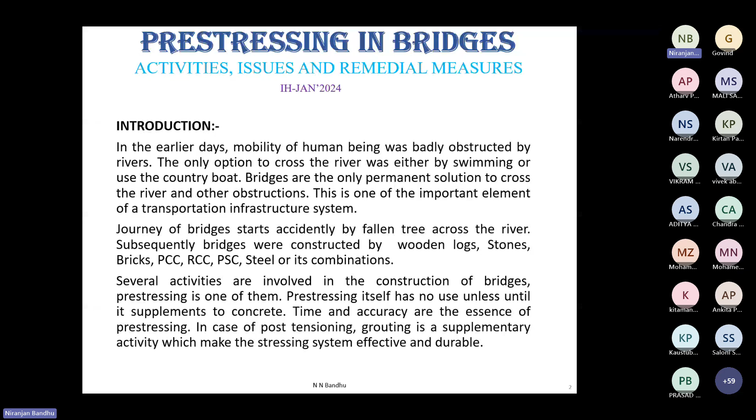Prestressing itself has no use unless it supplements the concrete. Time and accuracy are the essence of pre-stressing. In case of post-tensioning, grouting is a supplementary activity which makes the stressing system effective and durable. Introduction of pre-stressing to concrete was pioneered by Freyssinet. The first pre-stressed concrete bridge in India was constructed in 1948 for a span of 12.8 meters in Siliguri on the Assam Link Rail project.

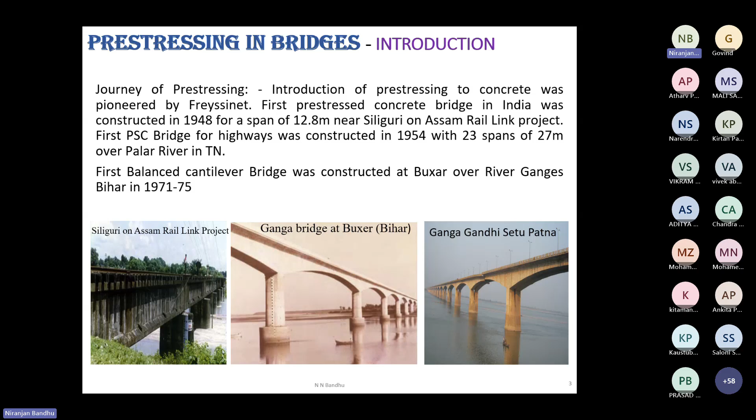The first PSC bridge for highways was constructed in 1954 with a span of 27 meters on the Palar River in Tamil Nadu. The first balanced cantilever bridge was constructed at Buxar over the river Ganges in 1971-75. Subsequently, Gandhi Setu was constructed and inaugurated in 1984 at Patna, and by that time it was the longest river bridge in Asia, 5775 meters. This is the journey.

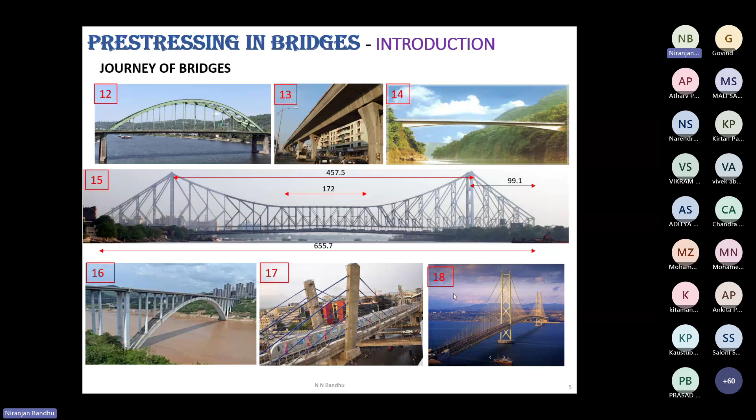Then arch bridge, cable stay bridge, and suspension bridge. Suspension bridge can be extended up to 2033 meters. Now recently it is to be inaugurated.

Vivek, sir. Yes, sir. We are able to see. Yes, sir, it is visible.

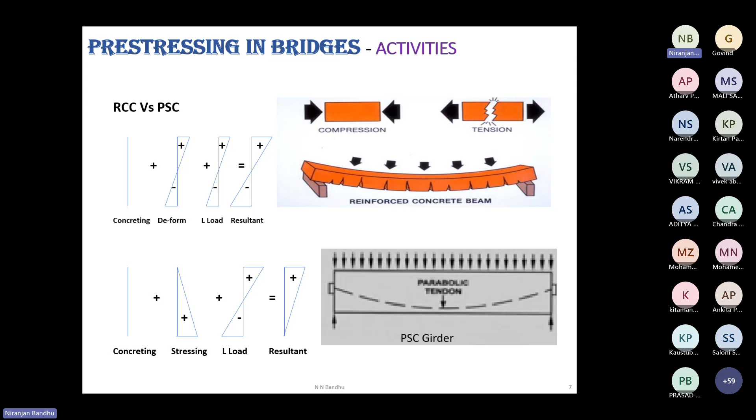But in case of PSC, there is no tension. Just see number one, only a vertical line is there, meaning no tension, no compression. But after stressing, there is compression at bottom, and at top there is neutral, no tension no compression. But after loading, at the top compression comes, and as a result at the bottom there will not be any tension, but at the top there will be compression only.

So how does it work? The function of prestressing is to compress the structure, and at the same time a self-lifting mechanism is there, like a rope we use for hanging our clothes. In a similar way, it works here.

So prestressing is an arrangement which is deployed permanently in concrete. It boosts up the tensile strength of concrete members. It is applied in a way which increases axial compression that counteracts the tensile stresses set up in the member due to dead load, live load, or accidental loads whatsoever may be.

There are several advantages with PSC: we can have larger spans and the section remains uncracked. We have seen previously there is no tension at the bottom, so it is uncracked and suitable for precast construction also, and very fast construction due to repetition possibility.

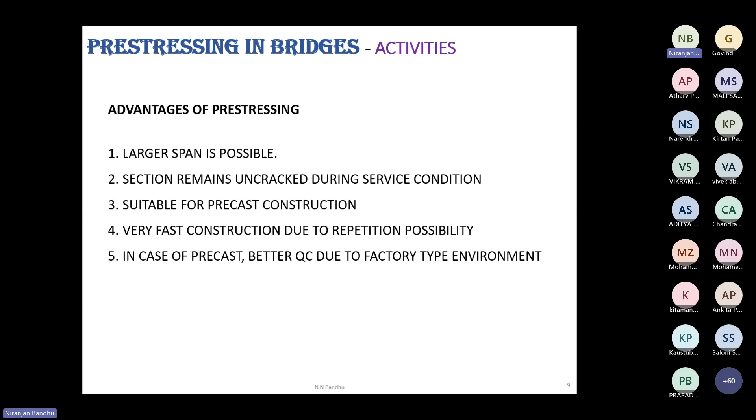In case of precast, better QC is possible due to factory type environment, but there are some limitations and issues. It requires highly skilled technical manpower due to precision work, relatively higher cost due to casting yard setup, and requirement of auxiliary equipment.

Design is more complex. There are chances of slip of wires, breaking of strands, punching of anchor cone or bursting of concrete, and leakage in sheathing. These are the issues and limitations.

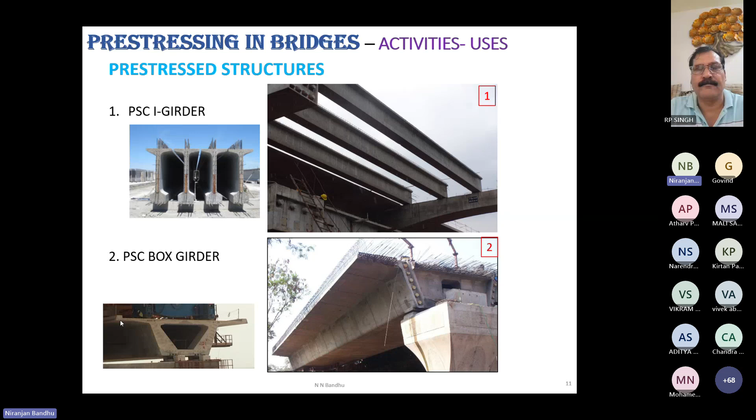Then box girder, it is a confined box, that is why it is known as box girder. Bottom is known as soffit, and the side, which can be vertical or inclined, is known as web. At the top, this top slab is known as deck slab.

Similarly, PSC segmental box girder is cast in pieces and stressed and grouted to make it one piece.

Then PSC U-girder, as the name implies, it is U type. It is more common and preferable for metro rail structures.

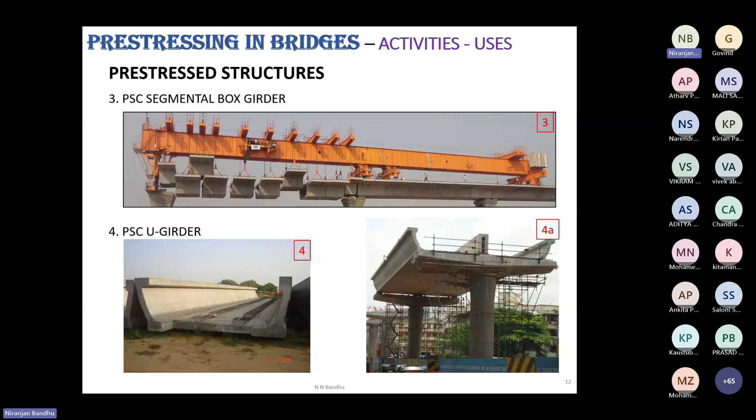It's a PSC pier cap. This can be cast in situ or precast to increase the headroom and lower down the deck slab.

PSC portal - sometimes a portal is required to reduce the section, so PSC is used.

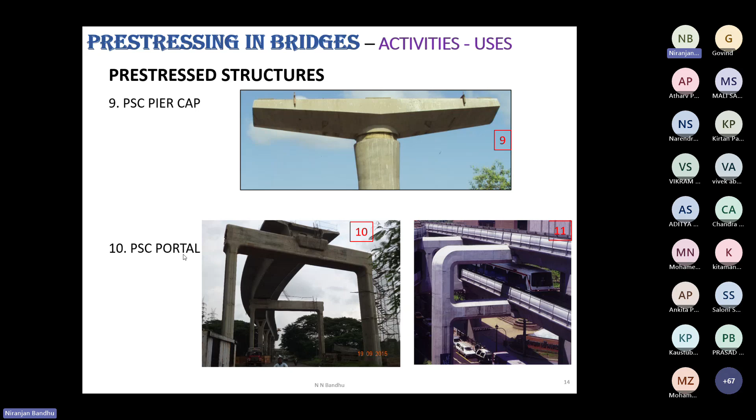Cantilever - this is the cantilever and this is PSC. And number 13 was not PSC.

Actually, it's a story from DMRC. Earlier, there was a provision of a portal, but some people, shopkeepers, were not allowing one pier on one side. Then they converted it to reduce the burden in addressing the requirement. Converted to cantilever, and then it collapsed.

Another one is very important.

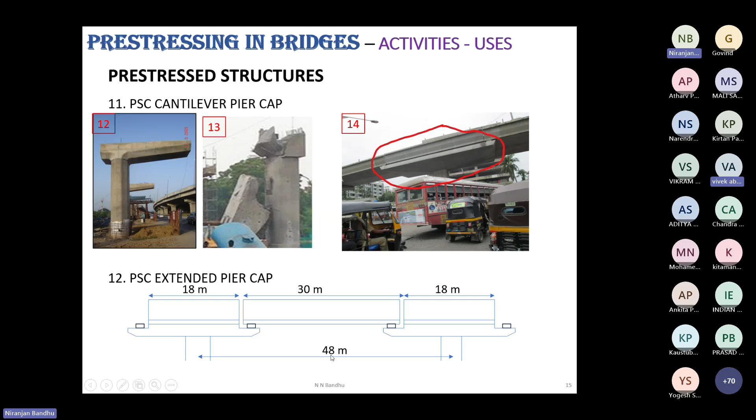This is we are talking about extended pier cap. This is the actual example of Mumbai Metro Line 1, where the Mithi river is there. Due to Mithi river, we have to have our pier on either side of the bridge without obstructing the river. Our U girder was 30 meter and we were not able to change here, so we have provided extended pier cap of 18 meter. So instead of 30, our obligatory span was 48 meter. This is the use of this extended pier cap.

Now, in PSC, sometimes we have to use prestressing system in deck slab also. Cable bridges also require prestressing. And sometimes we are using PSC in building also, building slabs, railway slab, railway sleeper, and electric pole. These are the uses of prestressing system.

Now we are talking about type by casting and stressing sequence. We have two types: one is pre-tension, another is post-tension. Pre-tension means we have to apply force before casting. Post-tension means first of all we have to cast, and we have provided a duct hole for the insertion of a strand, and after hardening, stressing is done.

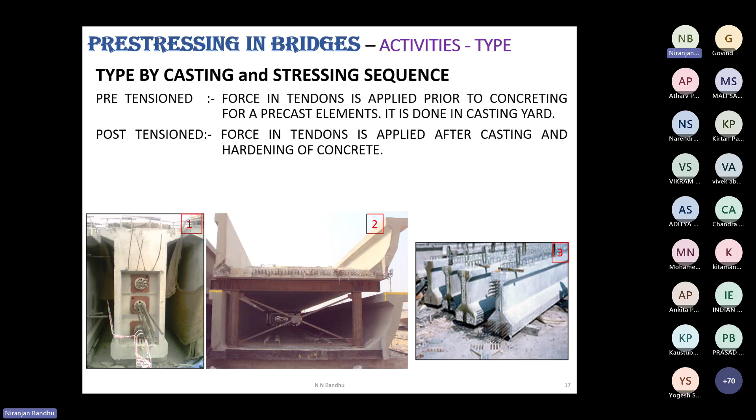By stroke, it can be a single stroke, two stroke, or multi stroke, because a ram in the jack has some limitation. So if elongation is up to 200 mm, then single stroke jack will be sufficient, otherwise we have to have more than one stroke. Sometimes, due to technical issue, we have to use it in 3 stages.

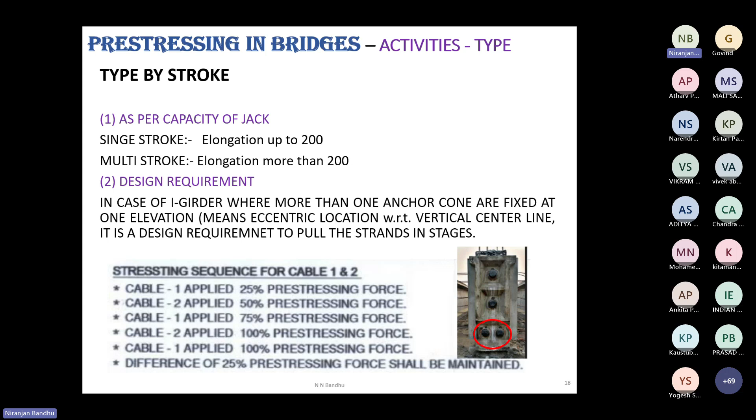I have given one photograph of an I girder with 2 cables at the bottom, both eccentric. Suppose anyone is stressed up to 100%, then there will definitely be a chance of bending. So we have to stress 25% only in one, then go to 50% in another, so the difference will be only 25%. So there will not be any chance of bending. So we have to take care if 2 or more than 2 cables are there at the bottom.

Now, stage wise. Sometimes we cannot stress all the cables at a time in one go. In that case, the problem is if we stress, there will be chances of tension and hogging will be more. So we are stressing few cables, then loading is given, then stressing, then loading, like that. So whatever hogging is there, that will be compensated after loading. Then once again it is stressed. So it is done stage wise.

Next is as per jack position. For shorter span, we are using one end stressing only. And if it is longer than 40 meter, then we are using both end stressing.

Now coming to anchorage system. This is the key accessory. Use of anchorage system is to just hold the stressed strand in position without any losses. It's a combination of anchor cone, bearing plate, wedges, spiral bars, etc., which is used to hold the tendons in a stressed condition, and at the same time it is used to transfer the load.

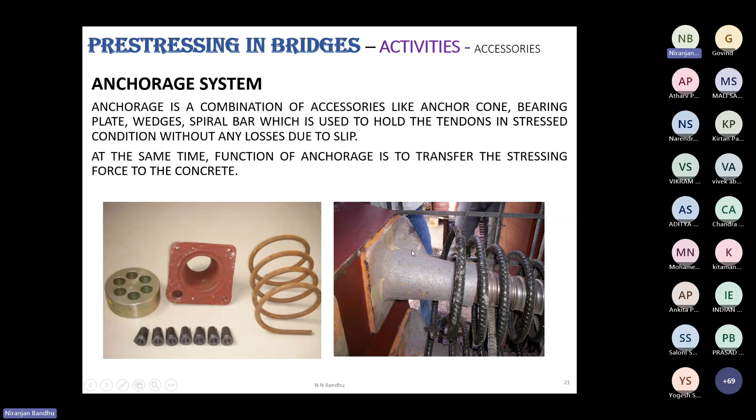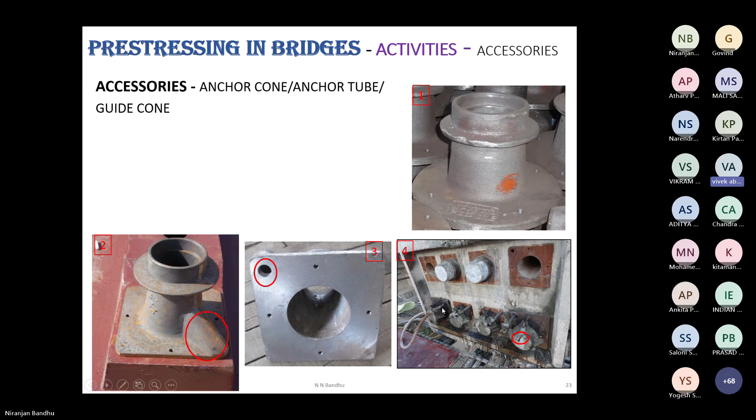Now coming to sheathing. We have 2 types of sheathing: one is bright metal sheathing, another is HDPE sheathing.

High density polyethylene, HDPE. The left side is meant for bridges, whereas this one is flat for slab. It can also be used in deck slab and building applications.

Diameter varies as per number of strands. The total internal area should be more than the total area of the strand. Only 1/3 of the area is occupied by the strand, so 2/3 space should remain so that grouting will be effective.

One important thing is jointing. Here jointing is done. On the left side, number 1, a heat shrink coupler has been placed.

You can see, Vivek sir. Hello, yes sir. Hello, yes sir, you are audible. Just I want to confirm whether I am talking or not, is it okay, are you audible? We can see the slides also. You can continue, sir. Okay.

So here this heat shrink coupler, this is known as heat shrink. Once it is heated, in the next slide you will see the same corrugation appears on the coupler also, and there will not be any leakage chance. There is no chance of leakage.

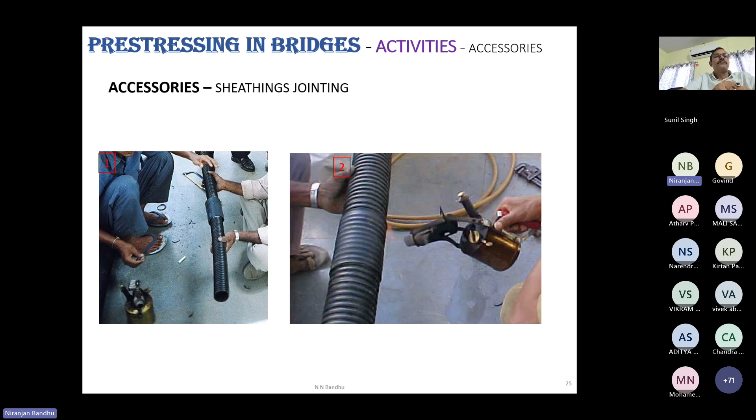Another accessory is the wedge plate or bearing plate. It is cut in pieces and a truncated cone hole is made, and after fixing it will look like this, number 5.

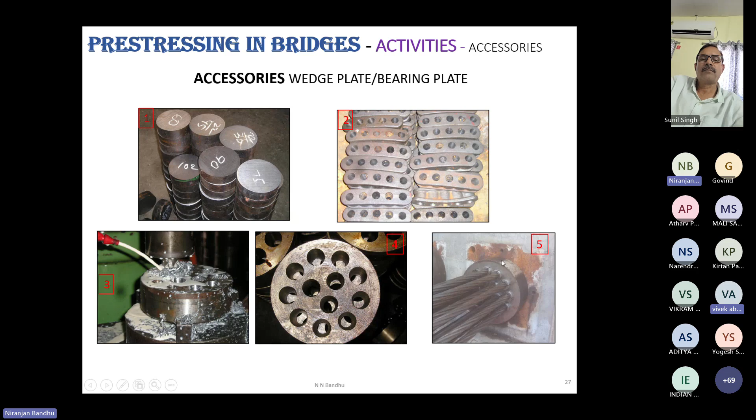Then wedges. It is cut in pieces of this length, and this shape is given, and after giving this shape, threading is done. Threading, photo number 6, we can see the threading is done.

But one precaution is that this thread should not be sharp enough to cut the strand. If it is sharp, the thread should be made blunt. It can grip, but there should be no cutting.

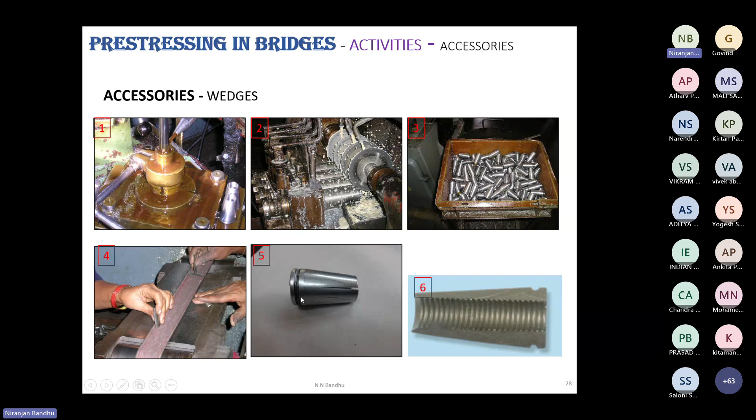After making this hole, the piece is cut. Number 2, we can see it is being cut into 3 pieces. It will come in 3 pieces, and one spring wire, a spring, is here to hold the 3 pieces together.

Now, main strands. Generally it is 7 ply. We have considered 15.2 mm diameter, 7 ply, and mostly we are using 12.7 or 15.2.

It has high strength, adequate ductility, low relaxation to reduce losses, bendability, high bond with grout and concrete, especially for pre-tensioning, and minimum corrosion. Now coming to tests, before stressing we have to do several things.

First of all, we have to do the anchorage efficiency test. Anchorage efficiency means while stressing, it should not break due to bite, base bite, or anything, and it should be safe for 95% of breaking force.

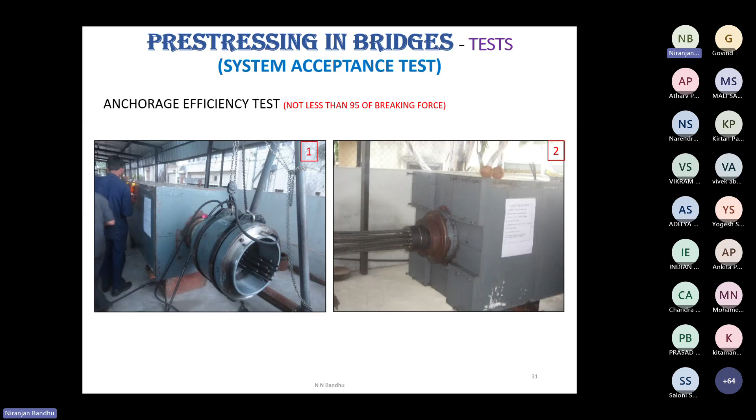Then the load transfer test. This is the actual preparation; the actual cone has been fixed here. After the cone, there is a horizontal jack. By the jack, load is being transferred. Here we can go up to 80% of UTS, and this resistance has been fixed here. This is also connected without any stress.

So we can see on the monitor if any minor crack is there, even if it is not visible. This test is horizontal, and the same setup has been kept vertical with a vertical jack applied to give the force. These two tests, anchorage efficiency test and load transfer test, are known as the system acceptance test. Before approval of the system, we have to conduct these two tests.

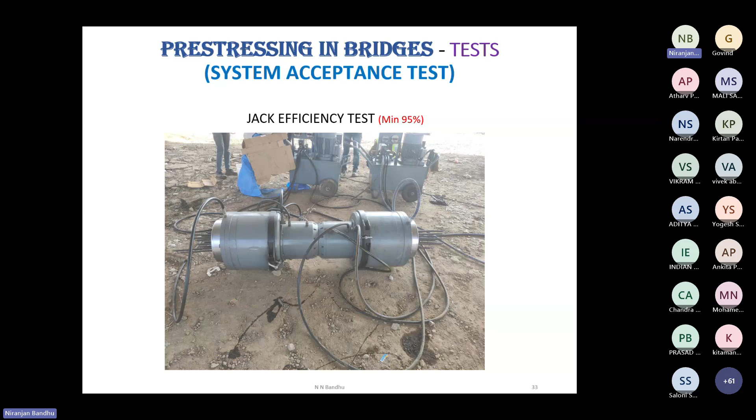Then this is the field test, the jack efficiency test. We have to ensure it is not less than 95%, and this percentage efficiency has to be incorporated while converting the jack force into pressure.

Now measurement. This is for typical 15.2, 1860 grade. We have to measure the diameter of all 7 plies, and out of 7, 1 ply at the center point is straight, otherwise all are spiral, and their diameter should be 1.5% more than the outer.

The diameter of a strand has a limitation, as per this grade. The lay length we can see at the bottom has been given on the graph, so here 1, 2, 3, 4, 5, 6 are there. One is inner, so we cannot see it; this is just carbon pressed.

So this point to this point is lay length, and there is a limitation of 182.4 and 243.2 mm. And straightness: after cutting a strand, it should be straight, but there is a limitation of 25 mm within 1 meter length. If we keep it on a level table or level surface, then this should not be more than 25 mm.

So this is the relaxation test. Here load has been applied. Here this green is load. After 100 hours, load was reduced like this. It is drawn on a semi-log graph, and it is extrapolated to make it 1000 hours here. So this is the graph for load, and this is the graph for relaxation. This relaxation has gone here to 1.8% or so.

So coming to HDPE sheathing, the requirement is density, shore hardness test, tensile strength, elongation at yield, melt flow index, Charpy impact strength, Charpy impact strength at minus 40 degrees also, and coefficient of thermal expansion. These are the requirements for raw material.

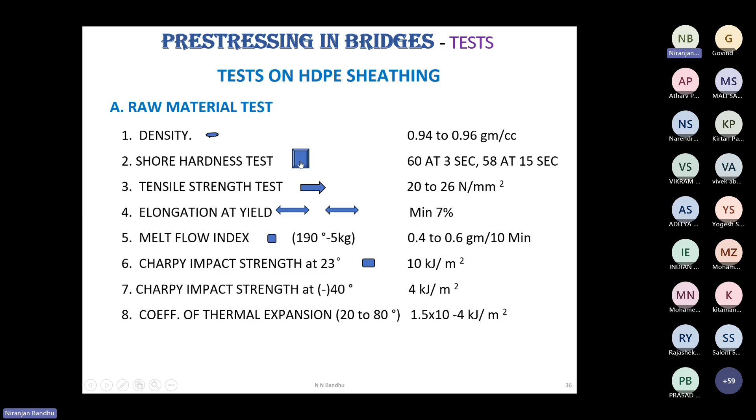Just I want to see whether we can see. No, sorry. So photo I am unable to show it anyway.

So now on product, what tests are required is the carbon black content test. Requirement is 2%; it should be more than 2%. Minimum 2% is required, and it helps us to avoid any ultraviolet effect. Then wall thickness we have to test, and diameter also.

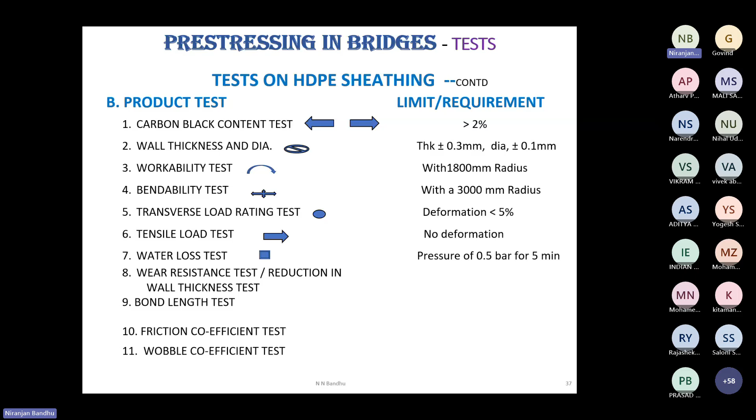Workability test, bendability test, transverse load rating test, tensile load test, water loss, whether it is water leak proof or not. Then wear resistance test, or reduction in wall thickness test, bond test, friction coefficient test, and wobble coefficient test. These are the tests required. Practically, how to measure the wear resistance test.

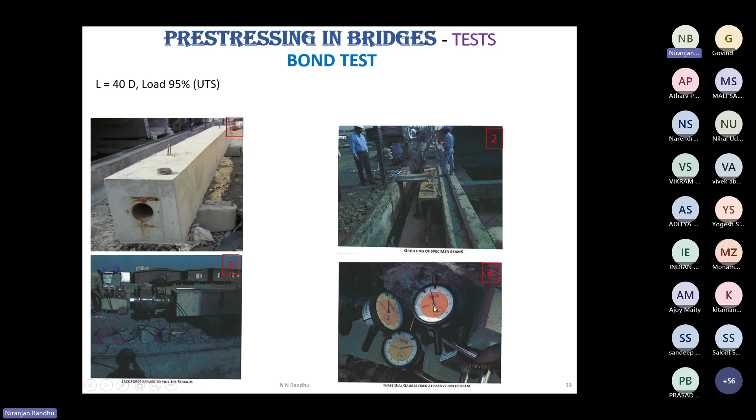After grouting, we are pulling it with 95% of UTS, and the wire should break, but there should not be any slip. And at the other end, we are using all this equipment to measure whether any slip is there or not.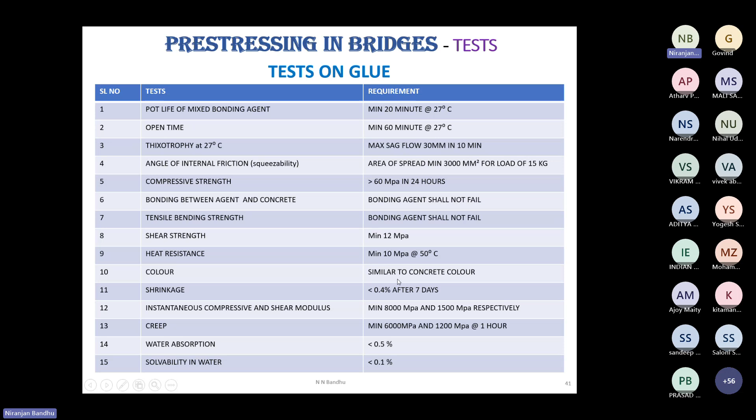Then tests on glue. We have to conduct several. First of all, the pot life: after how much time it will set and will not be workable. Then the compression test. Then for shear, we have this precast CC block, glue is applied there, and it is made rectangular. Load will be applied, and the block should break, but the glue should stay undisturbed. These are the parameters: pot life, open time, thixotropy, angle of internal friction. All these parameters are required before going for gluing.

Now coming to the execution part, a very simple part is the I girder. We will discuss in detail. So first, our activity is methodology approval, shuttering and staging, rebar, BBS, cutting, bending and fixing, anchorages and sheathing profile, concreting, finishing, prestressing, grouting, filling of edges and coal tar epoxy painting, and erection. In case of precast, erection has to be done.

These are the requirements. Now, wherever we are thinking of prestressing, measurement accuracy and time are the essence of prestressing. Here in measurement, most important is deviation angle, and another is measurement of elongation and slip, and time is when to be locked. All these three are the issues.

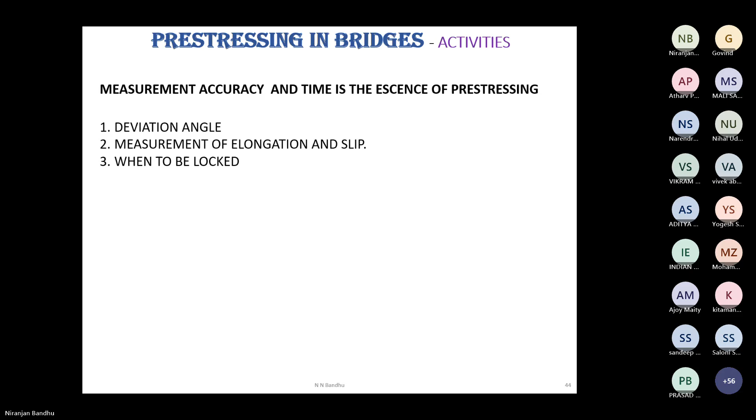Coming to deviation angle, this is one photo, just to see how much accuracy is required. In degrees, it has gone up to three decimals, 11.758, not 11.7 or 11. So just to see what the accuracy requirement is here. But in the field, people are reluctant and not taking care.

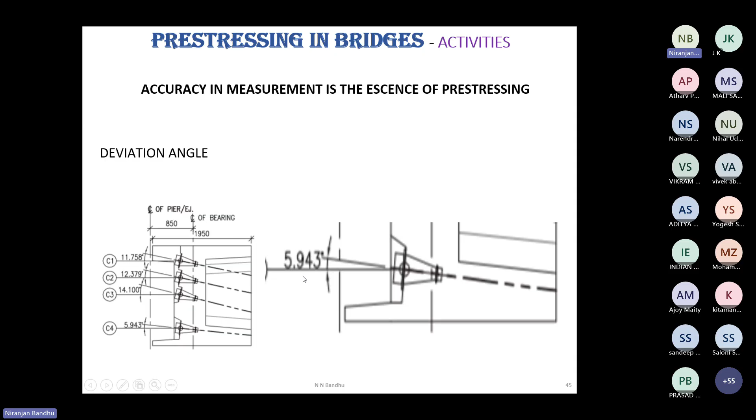We will see in another slide. We have considered one angle, 5.943. How is it achieved? We have taken it in two parts. One part is for fabrication engineers working for the contractor, and another part is engineers working as a consultant. Engineers working in the construction firm have to achieve this angle, and the consultant has to see whether this degree is accurate or not.

So we have a trigonometrical formula, sin theta equal to p by h. Here we have to find p, and this is 270 I have considered for the required jack, and this is the angle. So sin 5.943 equal to p by 270, so 0.103539 equal to p by 270. Therefore, p is equal to 27.955. So if we consider this lower point 150, then this point must be 177.955. Then this angle will be 5.943.

Another is, it is fabricated and came to site. Our checking engineer, the consultant engineer, must check it, but it is not possible to check just by a scale. We have to have one tool, a square bar tool like this, placed above the riser to measure it. Suppose it is 100 and this is 127.955, and we use the same formula, then theta will be sin inverse of this, equal to 5.943. So it is checked, whatever fabrication has been done is correct.

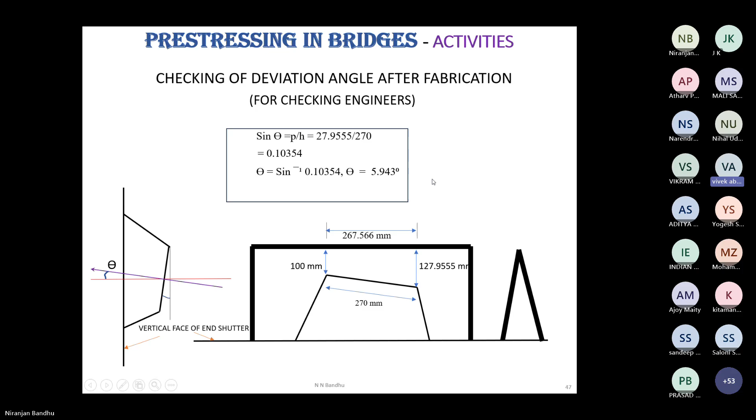Okay, sir. Vivek, sir. Yes, sir. You are audible. Yeah. Okay, thank you. I just received this.

This happened at my site. Our engineer told me, no sir, I checked it before concreting, after concreting it has gone. Is it possible to go like this? He gave me a bluff. But luckily I saw that this angle is not possible. So I put a scale, and I saw it was wrong. Then it was rectified.

Now some sequences of activities. Whether it is cast in situ or precast, some activities are similar, whether it is I girder or box girder. A casting bed is required for precast. If it is cast in situ, then staging is required. Then we fix the bottom shutter, then one side shutter, and the cable profile can be marked on the shutter itself, which makes profiling very easy. Then reinforcement with lifting hook. If it is a precast member, the lifting hook should not be missed.

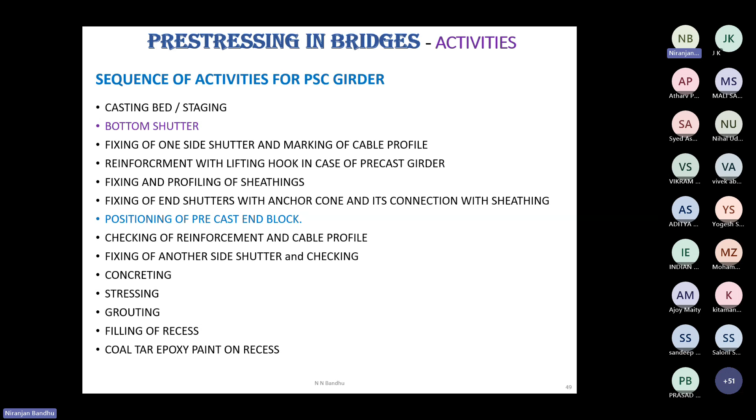Then cable profiling has to be done, and the other side shutter. The end shutter will be placed with an anchor cone connected with the sheathing, and positioning of the precast end block. I will discuss on another slide how this precast end block is important, and how punching or bursting of the anchor can be avoided. Checking of reinforcement and cable profile, fixing of anchor, other side shutter, checking, concreting, stressing, grouting, filling. These are common for all.

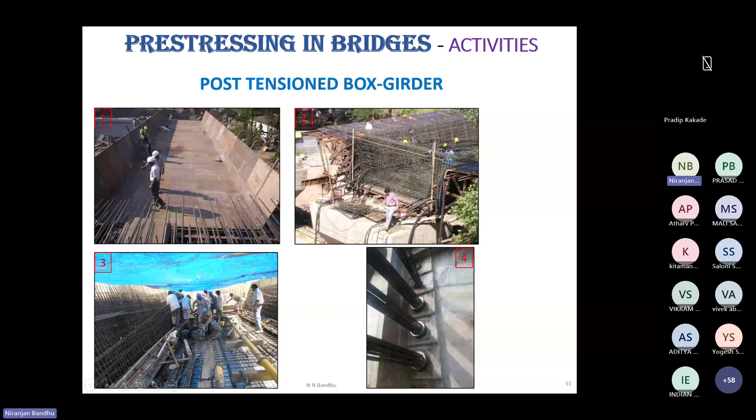In number 3, all outer shutters have been placed and concreting was done. This is for box girder: soffit shutter, outer shutter, reinforcement, concreting and stressing. Coming to pre-tensioned U girder.

This construction of U girder has been published in Indian Highway, September 25. This is the detail of U girder. Anyone interested can see Indian Highway, September 25th.

Then reinforcement is fabricated at another place, not on this shutter. To save time, it can be done in parallel. This is known as a jig. For the same dimension, we have fabricated it from angle section or channel section, and it is cast.

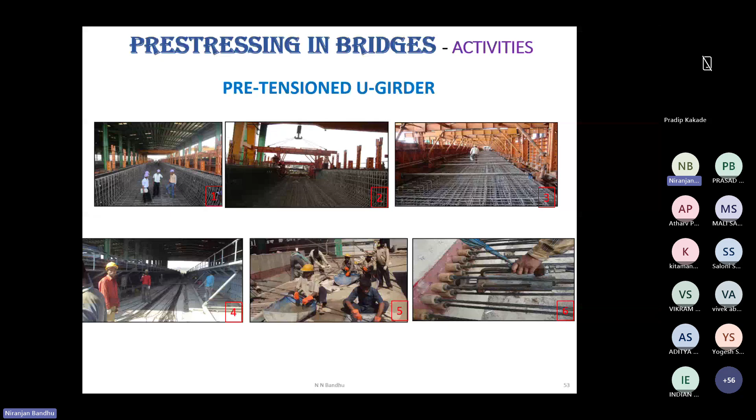Here, this wall is the reaction wall at the locking end. All these mono blocks are there, and this is the jacking end. All 6 jacks are there, and this jack is connected with the floating beam. This is known as the floating beam. And this floating beam is connected with the strands. Once the jack pulls this floating beam, the floating beam will pull all the strands simultaneously.

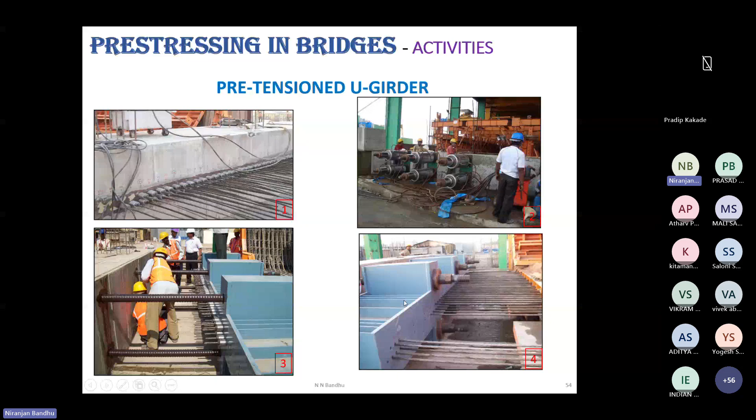So this floating beam should be strong enough, otherwise it can bend. I will show on another how it bends and affects the stretching.

Now, for segmental box girder, all is the same, only it is to be cast in segments, and we have to check the cable profile precisely, because it is cast separately and just touching each other, so the profile should be smooth enough. So casting is almost similar.

Then transportation of segments, lifting of segments, dry matching and application of glue, temporary stressing. After temporary stressing, threading of HT strands is done. Threading, the insertion of HT strands, is technically known as threading here. Then stressing, grouting and filling of recesses, coal tar epoxy. These are almost common. Here we have to see this segment.

This is the profile, and we have to cast in pieces, and after erection and stressing, this cable profile should be as given in the drawing. There should not be any variation.

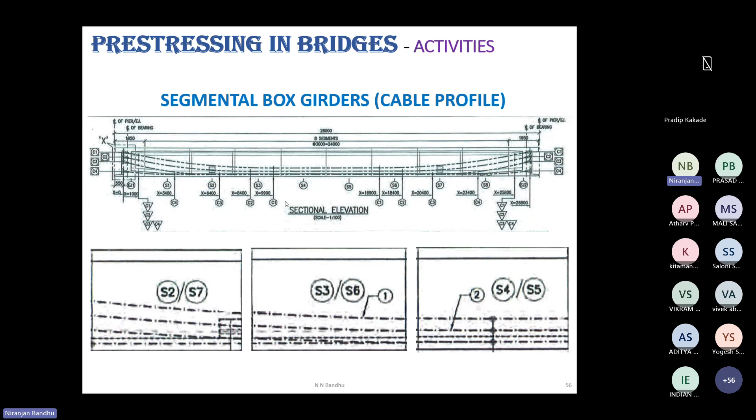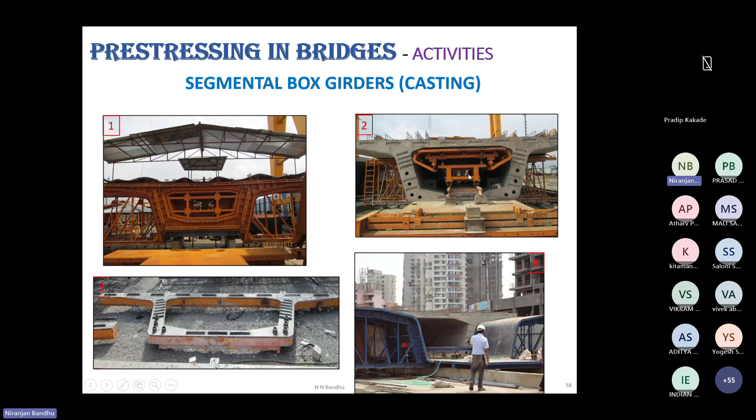The impression will be there. We can see in number 2 the shear keys, and after concreting, this collapsible inner shutter is resting on rail, and it can be taken out. Once it is cast, it is lifted and stacked in the casting yard. It is transported and lifted here.

Lifting is in progress, and after lifting, dry matching is done. So before lifting, what precaution do we have to see? There should not be any irregularity on this surface. Otherwise, there will be chances of leakage from here.

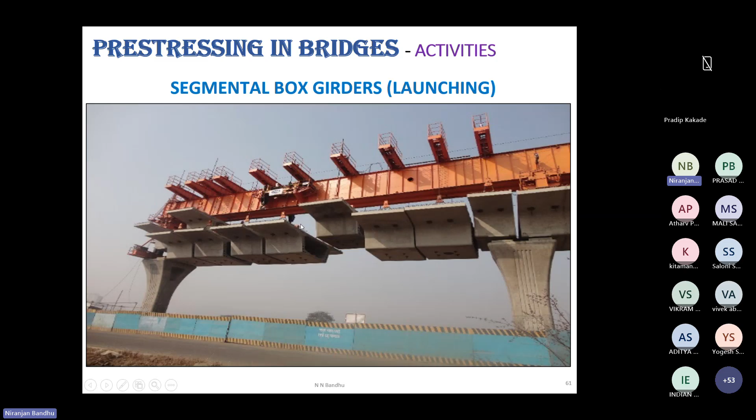Suppose a 2 mm projection is there, then it will not touch, and there will be leakage here. So we have to take care. It should be lump free. Any irregularity shall be smoothed before shifting from the casting yard.

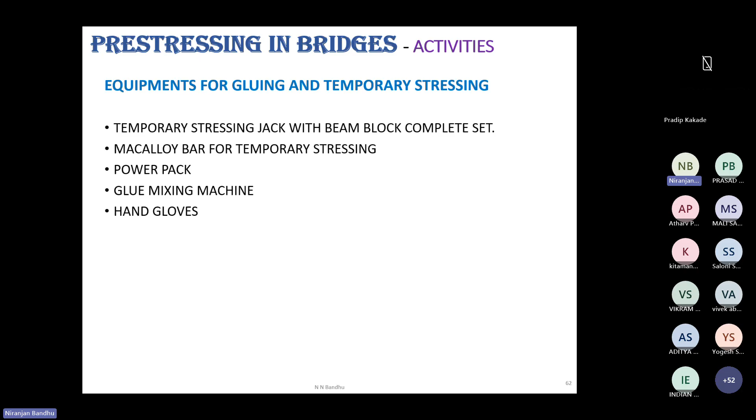After erection, temporary stressing has to be done. The requirements are temporary stressing jack with beam block complete set, Macalloy bar for temporary stressing, power pack, glue mixing machine, and hand gloves. These are the requirements. Here mixing of glue is being done mechanically, and it is applied.

This application should be uniform, 2 to 3 mm only, so that after temporary stressing it will be squeezed out. This is a temporary system. This is a Macalloy bar connecting here, a jack can be seen here, and this bar is connecting to this segment. This is the bottom soffit.

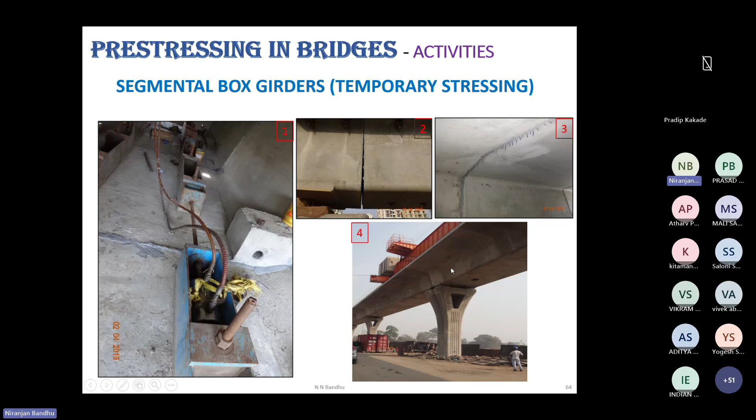Similarly, it is at the top also, and it is stressed. It is squeezed out. We can see in number 3 how it is squeezed out. And number 4 is after erection and prestressing.

Now coming to stressing, what we are discussing. For stressing, we must have a hydraulic multi-pull jack set. Set means jack, collar plate, and locking plate. Then hydraulic single pull jack, mono jack.

Mono jack required for emergency only. Suppose any strand is choked or is stuck or broken, then we have to take it out. So it is required for emergency purpose only.

Then power pack, pressure gauge, linear scale, master gauge, wax, petrol, and water. This petrol is required for cleaning purpose, and wax is required to be applied on master gauge, so it should not stick while de-stressing.

These are the activities. First of all, we have to review the drawings, and whatever elongation has been written, we have to see whether it is correctly written in respect of slip or not, because slip is one of the most important and naughty numerical values which affects the stressing system. Then cube we have to test, of course.

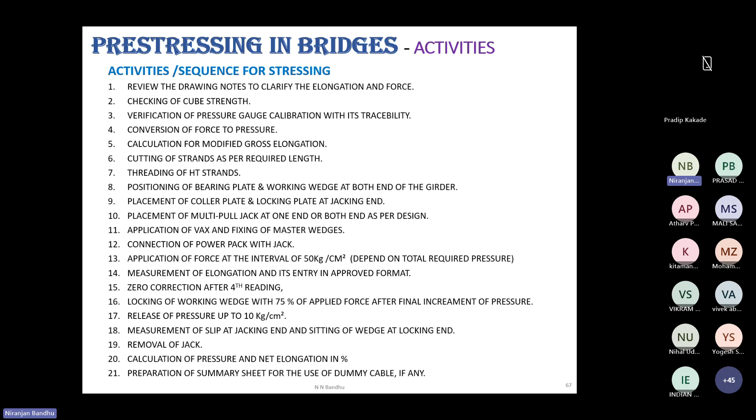Then slip we have to measure and jack to be removed, and we have to calculate the pressure and net elongation in percentage, what are the requirements and what we got. Then preparation of summary sheet, use of dummy cable if required. Then some paperwork we have to do. First of all, we have to convert the force into pressure, then modification of elongation, slip consideration, zero correction, data entry, and calculation of pressure in percentage. And if required, we have to use dummy cable also.

Since force is given in metric ton or kilonewton, we have to convert it. So we have taken one force, 378.2 metric ton. Now we are going to convert. There is a formula: design force, and since it is metric ton, we have to multiply by 1000 to make it kg. Then ram area in centimeter square. Then jack efficiency we have to consider here. So we got 365 kg per centimeter square pressure is required to achieve

378.2 metric ton. If it is given in kilonewton, then it will be 3710 kilonewton. Here kilonewton we have to convert to newton, then we have to convert in kg, for which we have to divide it by 9.81. So we will get the same thing.

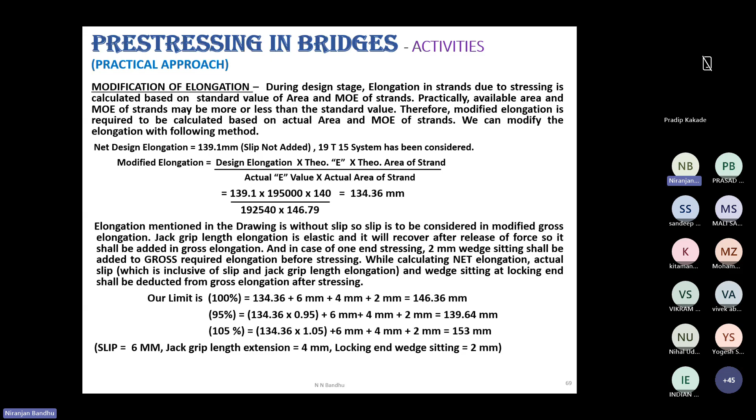In some cases, designers are writing the elongation including slip. So before calculation, we have to deduct 6 mm. Then the same calculation will be there, and then you add it. Then you will get the most accurate number for the stressing.

So some practical problems we face: here we can see, number one, this wedge spacing is not equal. What will happen once it goes inside? The outer diameter will get reduced. Then it will touch, and here there will be a gap. Then this part will rotate like this, and this part will rotate like this. Then there are chances of bite, because this will work as a knife, and it will cut during stressing.

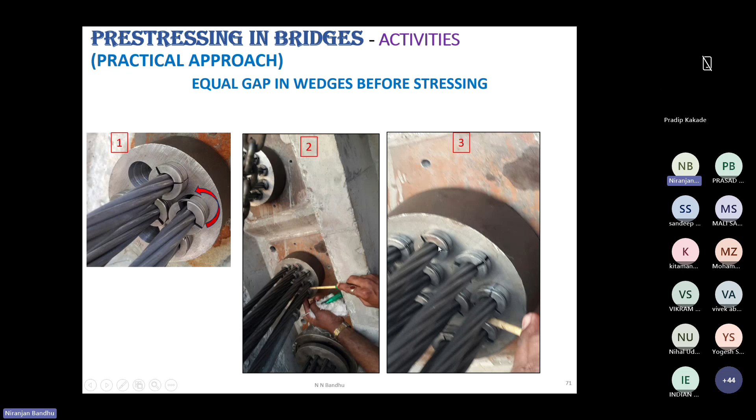If it is there, with a screwdriver it should be made equal before stressing, and after stressing we can see it is equal. So we have to take care. These are the components we discussed. Collar plate, this is the collar plate. This jack will rest here only.

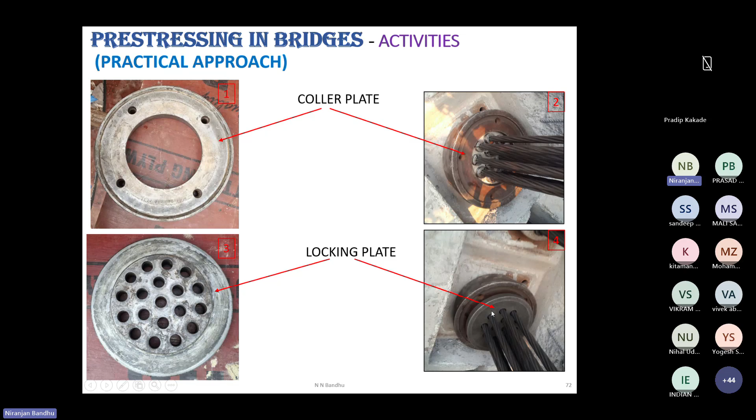Then we will place the locking plate here. This jack will rest here on this collar plate, and this locking plate will be used after stressing to lock the working wedge. Another part of the jack will push this locking plate. This locking plate will push the wedge, so it will be locked.

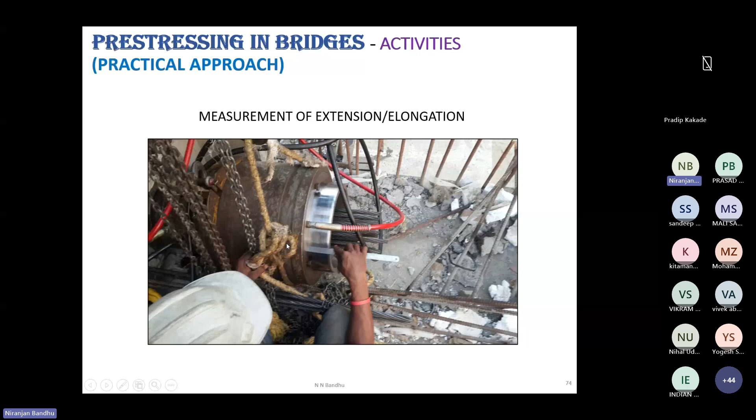So after tightening of the master wedge, the locking wedge, and pulling is done, after pulling we have to measure here. This ram is coming out, and we have to measure the ram. That means this much the strand has elongated, and we have to do a zero correction, because the first reading will be more than the requirement.

Grip length we have to consider. Generally, it is coming 600 or 650. So it will come in the tune of 4.2 mm or so. So we have considered 4 mm.

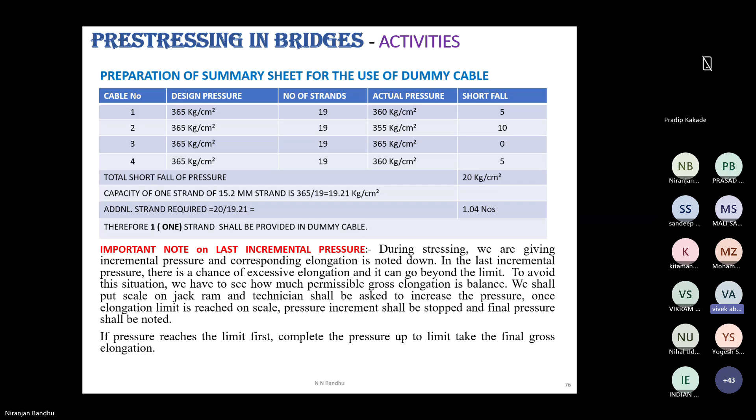What is happening at the last incremental force? Sometimes elongation shoots up, elongation gets out of our limitation. Suppose they are writing step by step, and the last requirement is only 2 mm, but our pressure is 25 kg. So while giving 25, instead of 2, it may go 5 mm. So it will jump. In that case, if it almost reached the elongation, my advice is to put the scale on ram and pull the strand. Once 2 mm is reached, just stop the pulling and see what pressure has gone. Then it will not jump and we will be in a safe position.

Sir, you have 10 minutes more. Okay, sir.

Okay, sir. Yeah, this grouting makes the system. System means concrete and strand monolithic.

For this grouting, clean and potable water is required, ice, lime, cement, and admixture. And for equipment: wheel cutter, grout cap, air vent, nipple with locking valve, grout agitator, grout sieve, grout pump, water pump, cube mould, hydrometer, and thermometer.

First of all, we have to see whether any slip is there. If slip is not there, then we have to cut the strand and fix the grout cap. Grout cap is filled with fresh water, see if there's any leakage. Then cleaning is done with 1% lime water. Grout is mixed and it is filled. Before filling, we have to take a cube also filled. Then duct is filled, and we have to see the grout in and grout out consistency. If it is the same, then we have to lock the nipple on the other end and open the air valve.

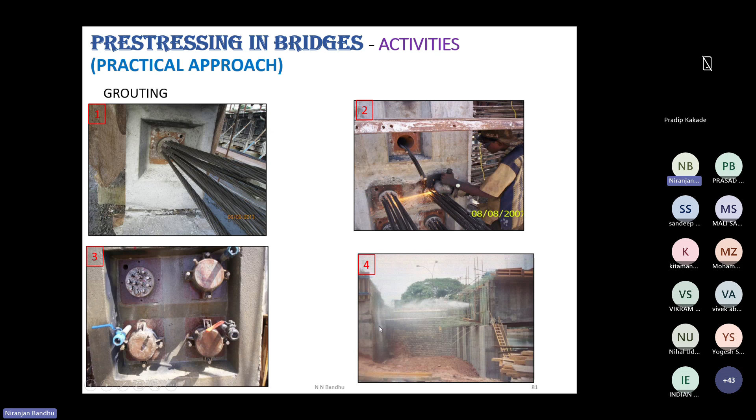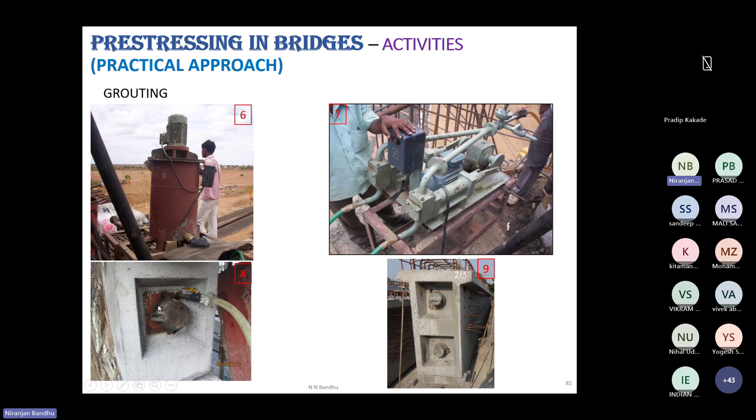This is some photographs. It is being cut and grout cap is fixed with nipple. It is being washed. Mixing is done in the agitator. This is the pump and grouting is started. After grouting, we have to remove the set grout cap because it sets like this. Then the recess is filled, letterbox type shuttering, and after setting, coal tar epoxy is applied.

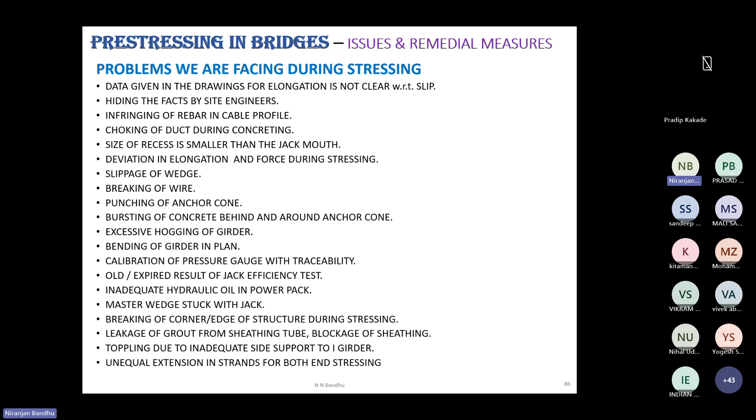Now, a remedial measure. What is the problem? Problem is data given in the drawing. This is regarding slip only. Slip is a very critical numerical value, but our designers are taking it very lightly.

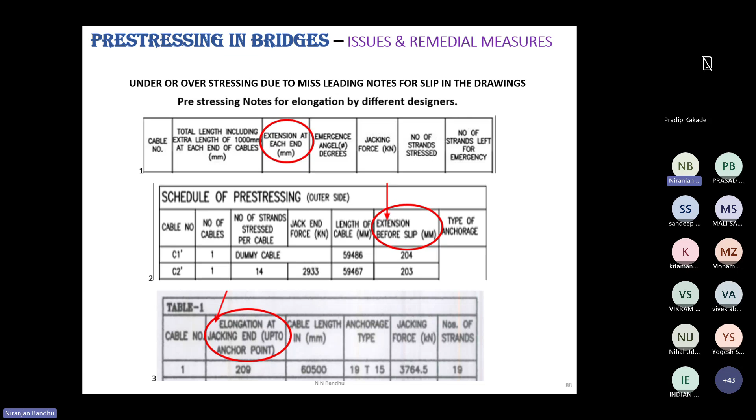Just to see how they are writing, this is from 3 drawings. They are writing in different language, and no one is writing clearly whether slip is included or excluded. What will poor site people do? They will assume anything. If the assumption is the same as the designer's, then okay.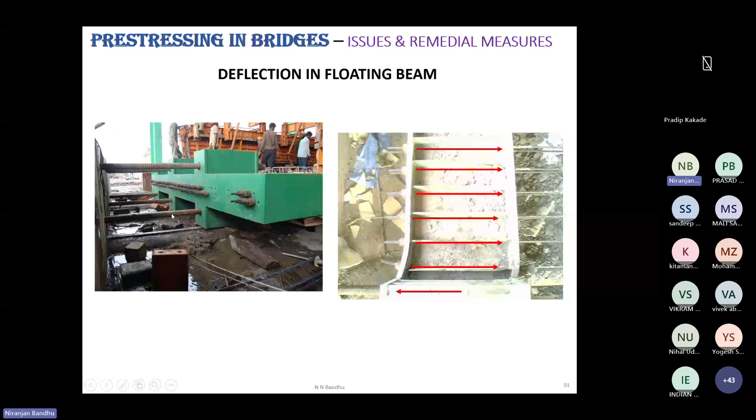Otherwise what will happen? 6 mm is a big thing for stressing. If the cable profile is not correct, then there are chances of cracks like this. So we have to rectify. And if it is not strong, then it will bend like this.

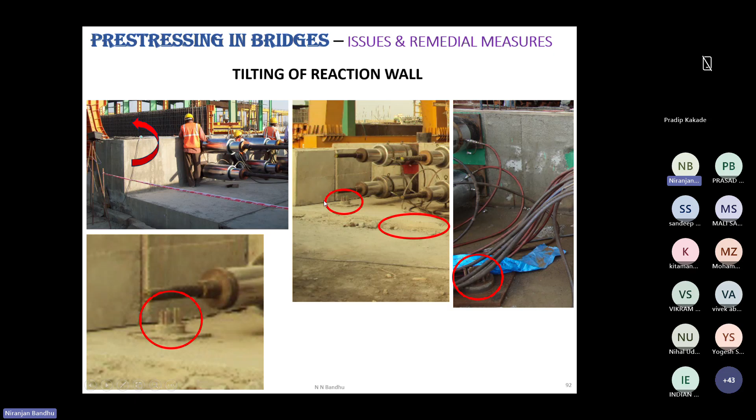In the floating beam of U girder, sometimes this reaction wall gets tilted. Here you can see the first photo, this is at level, and in the second it has gone up here. Then afterward rock anchoring was done here on the pile cap. This is the rock anchoring.

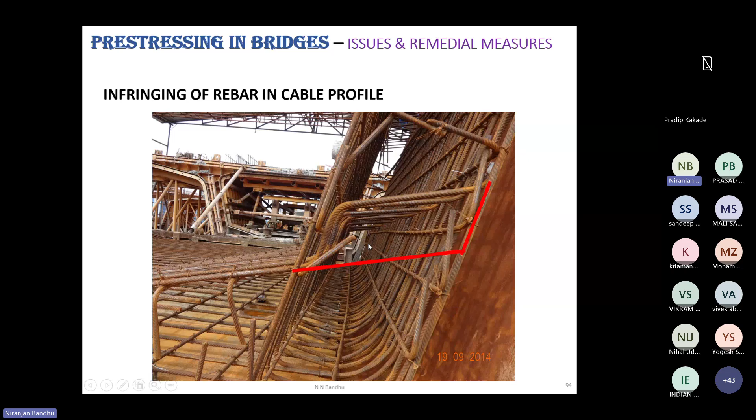Sometimes this is the reinforcement. Here the cable is coming at this point. So in consultation with the designer, we have shifted this reinforcement like this. We have not done it on our own; we have consulted the designer and they suggested it, then we have done it.

Sometimes elongation is not similar for both hinges. In that case, if any extra elongation is there on that side, we have to hold it, and from the smaller side we have to take first. Suppose 4 mm difference is there, 2 mm we can take first, and then the second we have to start. Similarly, by 2-3 steps we can equalize it.

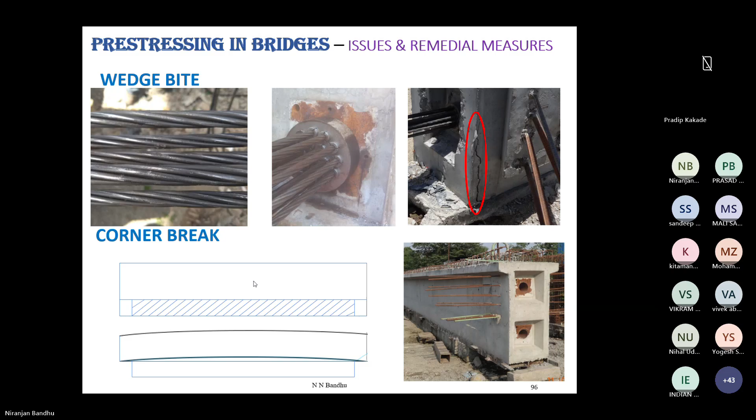Now major is punching. These are some examples of punching, and punching of anchor cone. A technical paper on this has been published by JESA in September 2022.

And what we discussed earlier, precast end block - this is the precast end block for a 50-meter I girder having overall height of 3.8 meter. It was not possible to cast here without honeycomb, so I suggested to the contractor, Techni Bharti in Kerala, and he accepted my suggestion. It was cast like this and erected here. For box girder also, we can use like this.

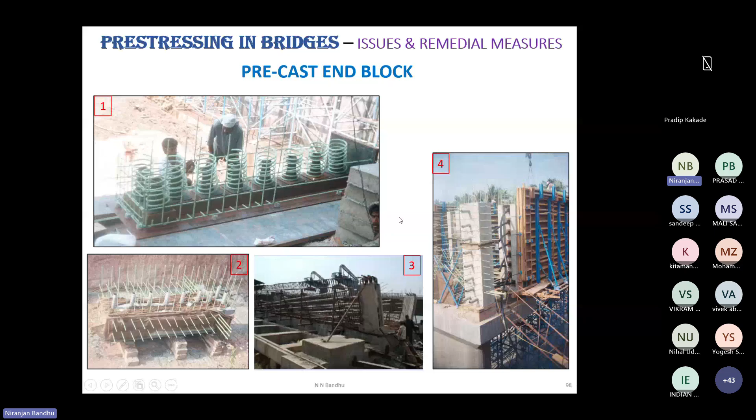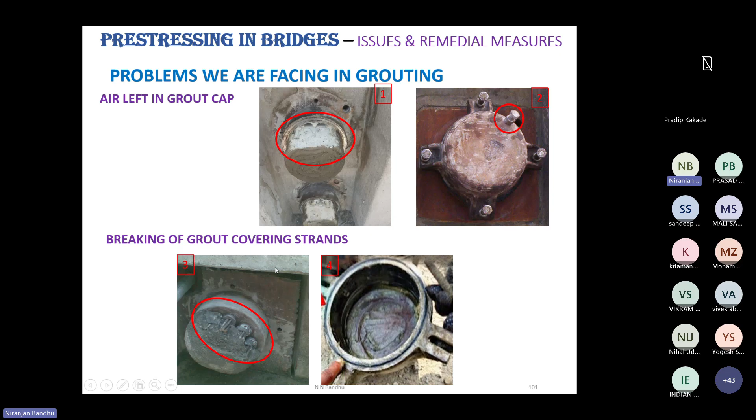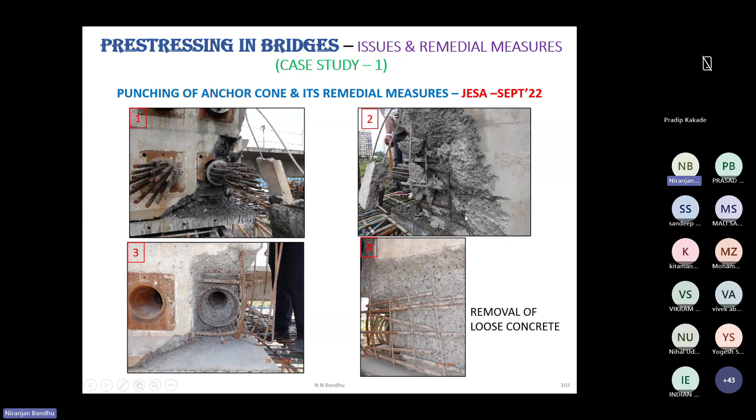Sometimes during stressing, we are not using proper side support and it can topple down. This is one of the cantilever beams of metro. It was like this, then it was cleaned, studs were used and concreted, finished, and stressing was done.

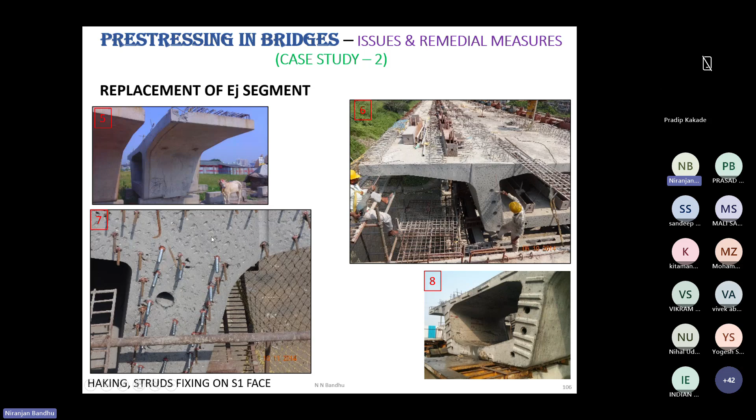So we used shear studs here and hacking, and it was placed, and reinforcement we placed here, and it was cast. After finishing, you can see the metro and the metro train running now.

So what type of precautions do we have to take? One dummy we have to use. And during concreting, please listen, dear bridge engineer: while concreting of I-girder or box girder near anchor cone, please don't pour the concrete for 1 meter.

Pour the concrete 1 meter away from the anchor cone, because in the anchor cone area congestion is so critical - our concrete will not go there, only aggregate will go first. So pour the concrete 1 meter away from the anchor cone, and then after vibration, take it there.

So there will not be any chances of honeycomb, or better to have a precast block. If any repairing is required, do the repairing before. Don't hide anything.

Senior should also ensure their junior people are not hiding and not afraid of anything. All test reports should be there. Concrete should be tested before.

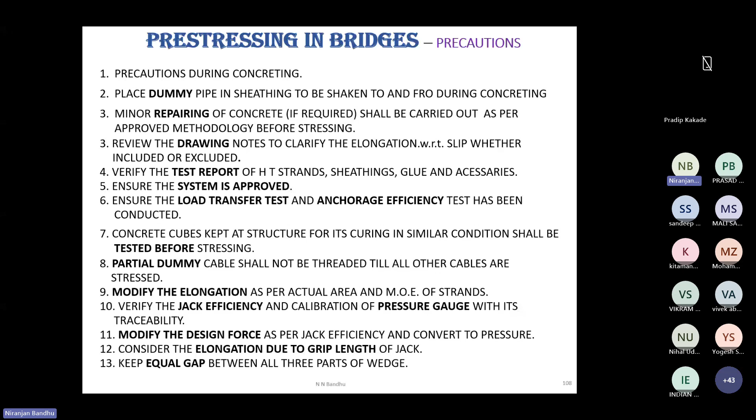All wedges should be equally distant, and a strong ply or wooden barrier should be placed behind the jack for safety purposes. We also have to check the availability of hydraulic oil.

Sometimes during stressing, what we saw was no pressure coming. What is the problem? There is insufficient hydraulic jack capacity, so we have to check. These are the precautions. With this, I want to say thank you for listening to me.

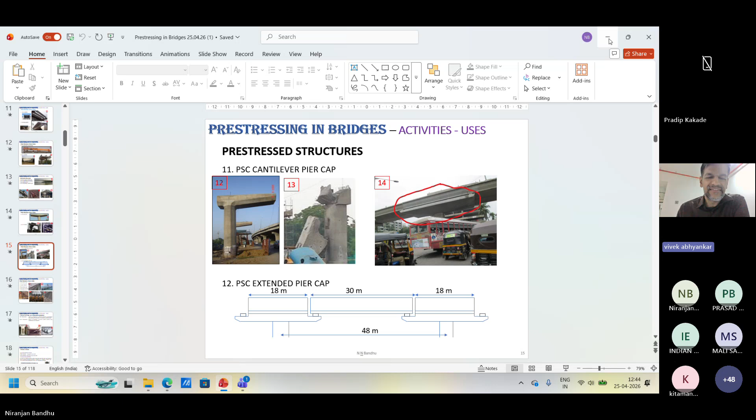There are certain questions which have come. Okay, yeah, first of all, let me thank you for giving a wonderful presentation. We were falling slightly short of time because it should have been another 2-hour session. Correct, right? Even 2 hours is less for all activities, for the complete activity, because on the same topic, when I go to L&T, they give me 1 day to speak on pre-stressing.

So sir, let us start with the questions. There are certain questions which have come. Let me start - there is Mr. Swapnil Harekar, he has asked what is zero correction.

So I think you have already explained that. Then Mr. Nihal is from UK, he's asking how the decision is made whether to apply pre-tensioning or post-tensioning. So he's probably asking pre or post, how to decide that.

Pre-tensioning and post-tensioning depends upon the quantum of girders to be cast. In case of I-girders, we can cast 20 meter, 5 girders in one series simultaneously. But for that we need a lot of land and infrastructure. If the quantum is more, suppose 5,000 girders have to be cast, then it is very easy and economical. Otherwise, for 100 girders, it is not economical. So this is the issue.